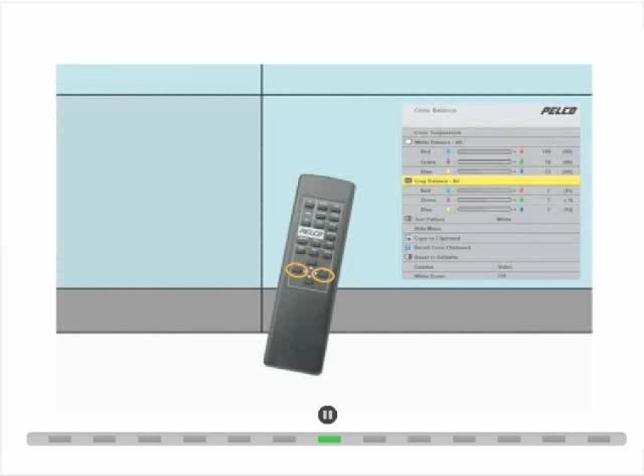Use the plus and minus keys to set the brightness equal to the gray brightness reference cube. When it is properly set, hide the menu and compare the screen to the reference cube. Readjust if needed. Repeat for each cube until all cubes are the same brightness as the reference cube.

The next adjustment is for gray hue. With all menus hidden, choose the bluest cube for the gray hue reference cube. Move the remote close to a cube next to the gray hue reference cube. Press Enter to show the color balance menu. Move the highlight bar to Gray Balance Red.

Use the plus and minus keys to set the color equal to the reference cube. When it is properly set, hide the menu and compare the screen to the gray hue reference cube. Readjust if needed. If adjusting the red does not produce a satisfactory match, adjust the green also.

Rarely, you may need to go back to Gray Balance All. Adjust the blue only if needed. Repeat for each cube until all cubes are the same hue as the reference cube. Copy your settings to the clipboard, then proceed to the following steps.

Here you will need to generate a test pattern from the wall's external signal source. The test pattern should include lines that cross the mullions of each cube. In this procedure, you will align the picture so the test pattern lines meet at the mullion junctions.

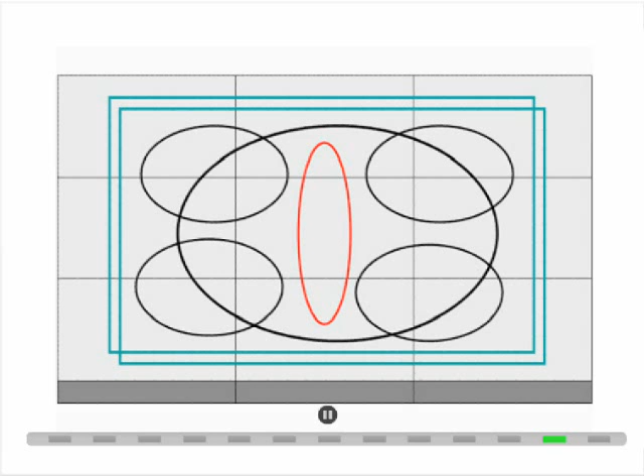Keep working outward until all cubes have been aligned. Repeat optical engine alignment on any cubes that will not align the test pattern lines. If you have done everything correctly, you can enjoy the spectacular results.

The lamp operates at a very high temperature, making it necessary to cool the lamp gradually when the display is shut off. Sudden removal of power can shorten its life. The shutdown sequence requires a little more than 5 minutes.

Press the off button on the remote to start the shutdown sequence. The fan continues running during the cool-down period. When the fan stops running, the power switch on the back can be shut off and the power cord disconnected.

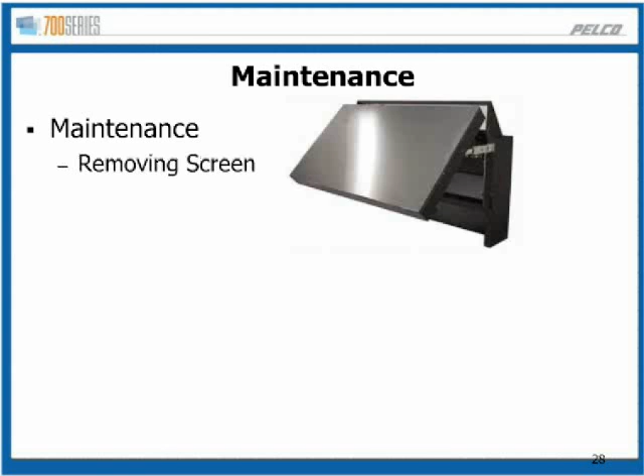The manual includes detailed steps for routine maintenance and service. Follow these steps to prevent damage to the screen and optical engine components. You should always refer to the manual for the steps needed to remove the screen, change the lamp, change the air filter, or clean the screen and mirrors.

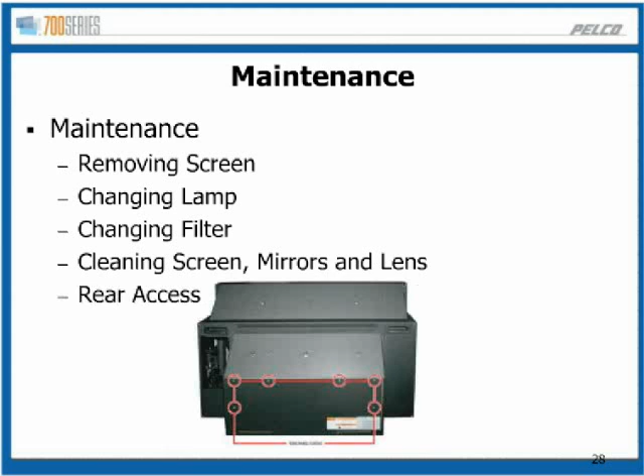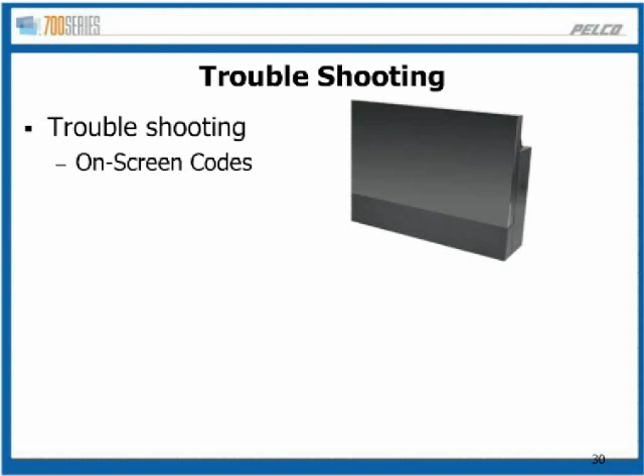Rear access is preferred for reaching the internal components. The back panel is attached with 6 quarter-turn screws and has an electrical interlock. Troubleshooting is supported by on-screen codes that are visible even when the lamp fails, along with LEDs on the internal electronics module. Tables in the manual explain the code and LED meanings.

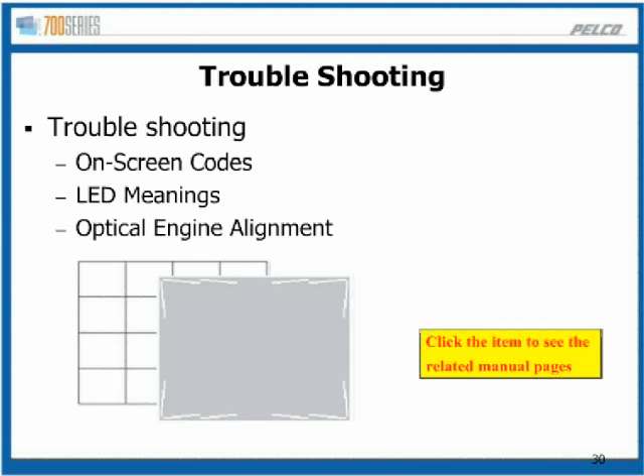Picture appearance problems may require optical engine alignment. Before attempting to realign the optical engine, you should recall any saved adjustments. You may need to help a customer who has lost the picture on a cube, on a group of cubes, or on an entire wall. A checklist or troubleshooting procedure is helpful for solving this problem. This slide gives a suggested approach.

If there are no on-screen codes or lighted LEDs, you need to check for power. Are the cords connected to outlets? If cords are daisy-chained, is the first unit in the chain plugged in? Are the power switches on? Are the fuses blown? In a daisy-chained hookup, power switches are independent for each cube, but the fuses are in series.

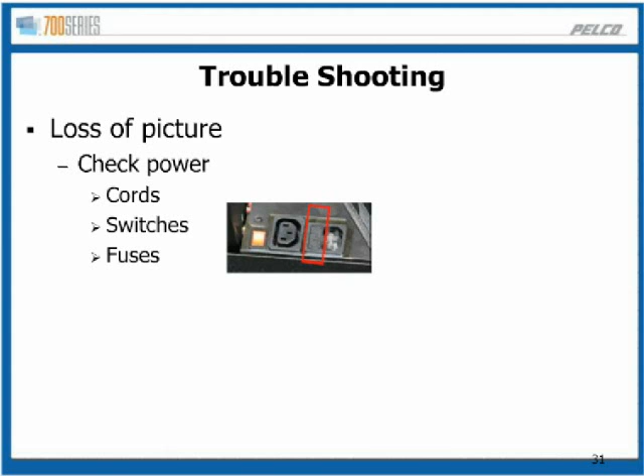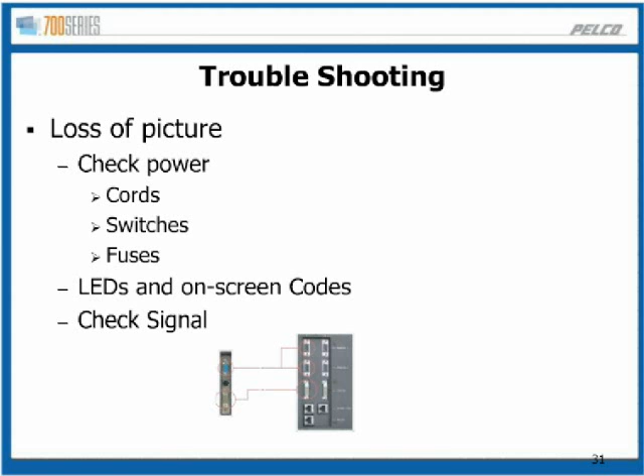If you have on-screen codes or lighted LEDs, you have power. In this case, the LEDs or codes may help diagnose the problem. Another possibility is a lost signal. Use a troubleshooting technique, such as swapping the signal cable with a known good display, or connecting a cable from a known good source.

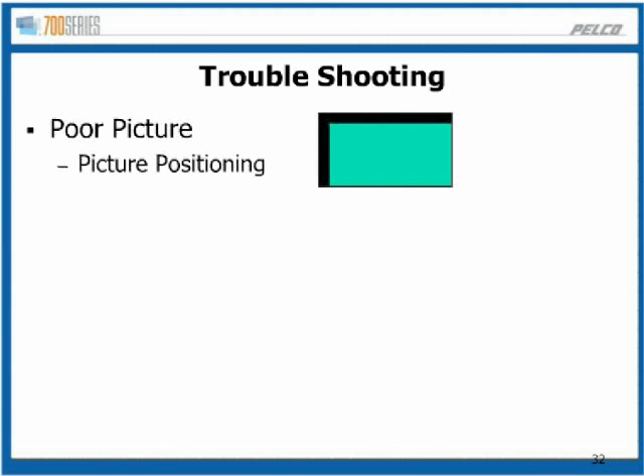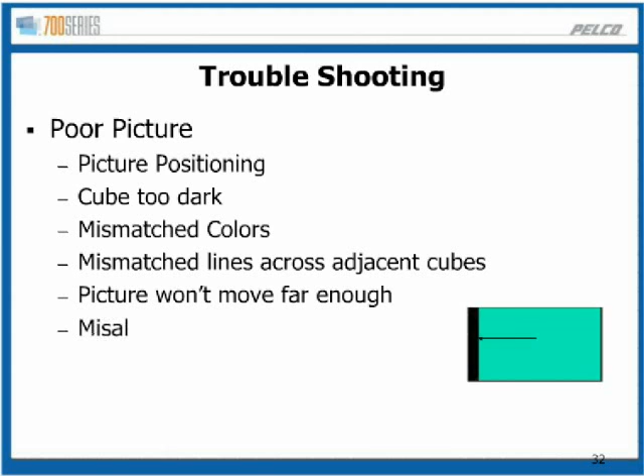In another scenario, a customer calls with picture quality problems. Many problems are due to the position or size of the picture. Other problems may have to do with the brightness or colors. If optical engine alignment has been performed properly, the picture position and zoom adjustments should be able to make lines match across cubes. If the picture won't move far enough, optical engine alignment will have to be repeated. Be sure to realign all cubes in the proper order.

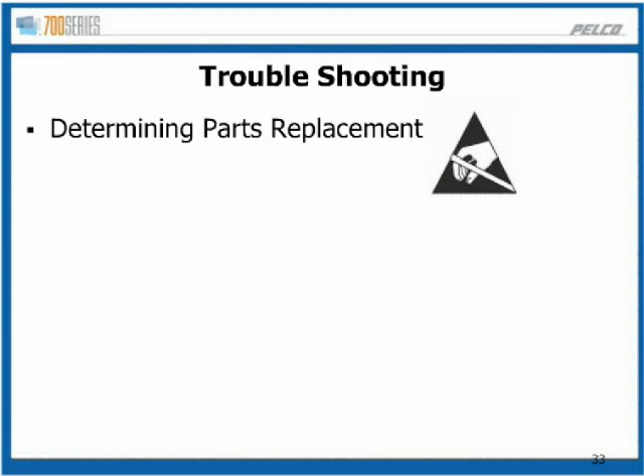Some problems might require the replacement of a part. Electrostatic discharge precautions should be observed when handling any of the electronic modules or components in the unit. A few simple tests can verify lamp failure. If the cube has power, on-screen codes will tell you if the lamp is bad. The lamp must be allowed to cool for 15 minutes before it is handled.

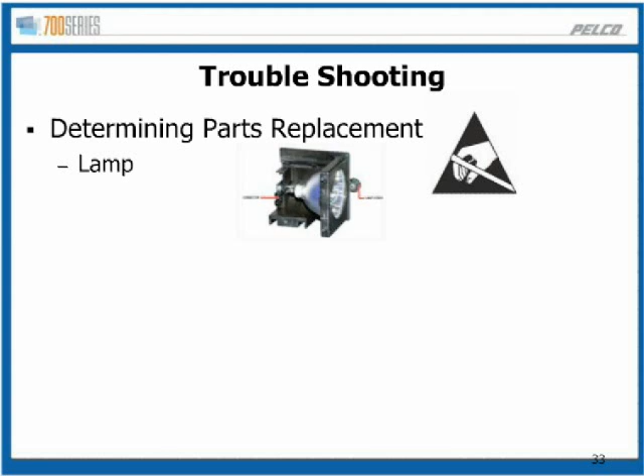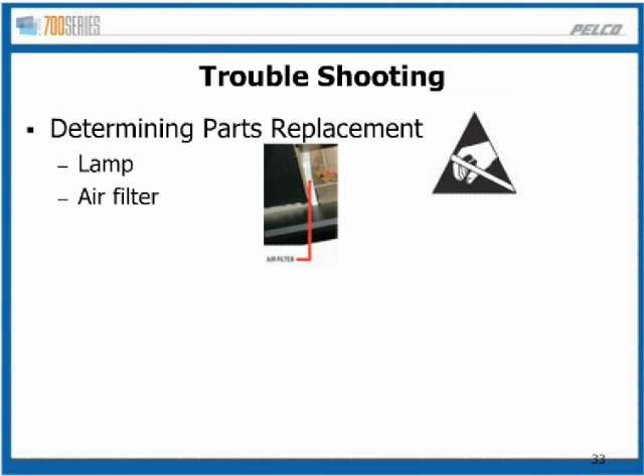The air filter needs to be examined to determine if replacement is necessary. During the early life of newly installed cubes, the filter should be examined often to establish a replacement interval. A noticeable whining sound indicates the color wheel may soon fail. Immediate replacement is recommended. Careless handling or repeated opening and closing can cause screen damage.

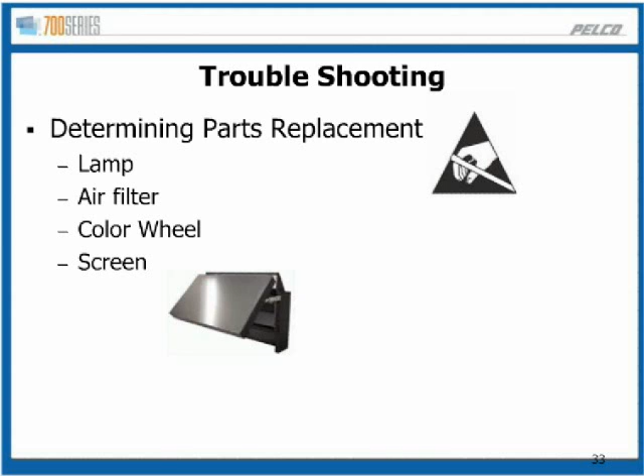A damaged screen should be replaced. If the screen is not broken or cracked, it can probably be repaired at the factory. A replacement screen should be sent to the customer, even if the damaged screen is going to be repaired.

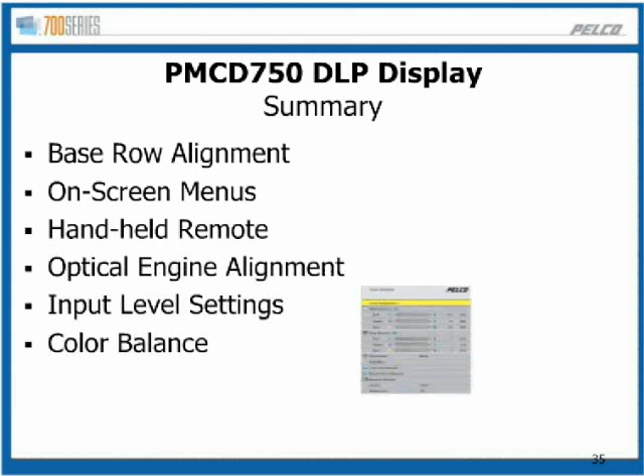Base row alignment is critical when using the PMCD750 DLP to build a video wall. Units are programmed by accessing on-screen menus with a handheld remote. Menu access tools are provided for optical engine alignment, input level settings, and color balance. Special care must be taken to protect the screens and lamp from damage. This completes DLP display training.